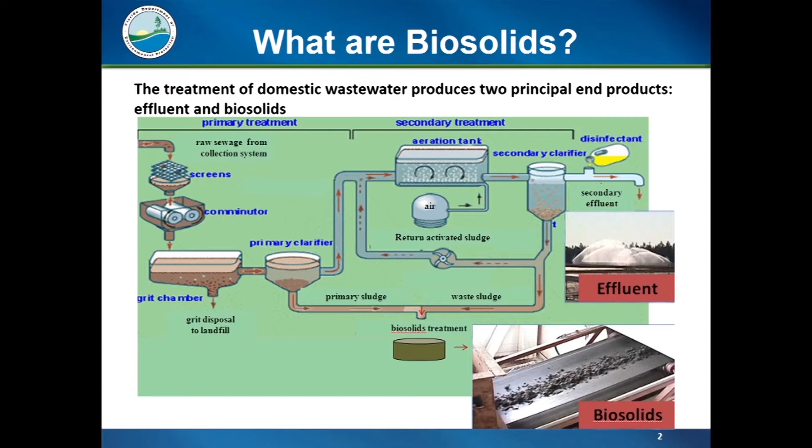So they are the solid, semi-solid, or liquid material produced from a wastewater treatment plant. As the biological process goes on, the microorganisms die, and those have to be wasted periodically. The term biosolids is actually defined in most modern dictionaries as the solid organic matter recovered mainly for fertilizer.

We use biosolids to mean all the material, whether it's treated or not. I know some states only want to refer to biosolids as the treated material. We used to use the term domestic wastewater residuals, but most people didn't know what those were. We had never used the term sewage sludge, and what happened was over the nation, the term biosolids just became the common term, the easiest one to find in our regulations. So we shifted to the term biosolids.

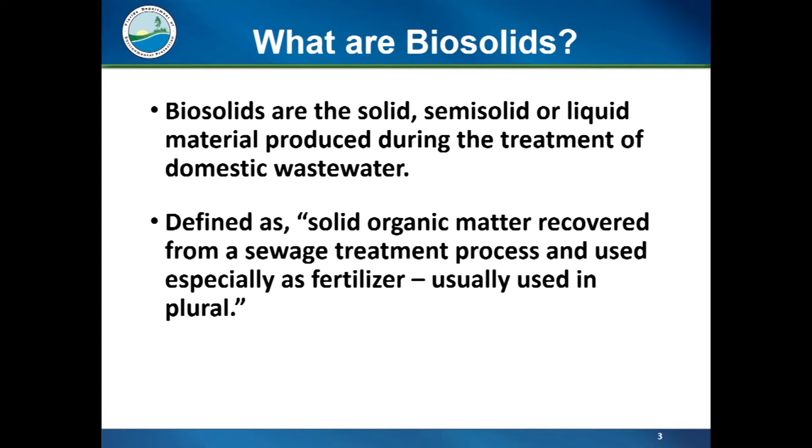Now when a wastewater treatment plant treats its sewage and comes up with biosolids, it has a number of options it can consider. Most facilities in Florida, because we have a whole bunch of small facilities, transfer their biosolids to other facilities for treatment. It's not cheap to treat the biosolids.

Can you hear me? Am I holding it close enough? It's not cheap to treat the biosolids, and when you get larger facilities, you have the economies of scale. So for small facilities, it's really not worthwhile — they're actually probably paying the most per unit cost per dry ton in transferring their biosolids to other facilities.

Landfill — biosolids can be landfilled. We put in every wastewater treatment facility permit the option to landfill their biosolids. But one thing we don't put in is that the landfill can't take liquid, so these biosolids have to be dewatered, then transported, and there are tipping fees. But just a word on landfills: landfills do not have to take biosolids, and only a small percentage do.

And those that do take biosolids operate on a rough rule of thumb of wanting at most 10% of their volume per day to be biosolids, because it comes in as a wet, muddy material that's hard for their equipment to work with. So for those landfills that do accept biosolids, they probably don't really want any more.

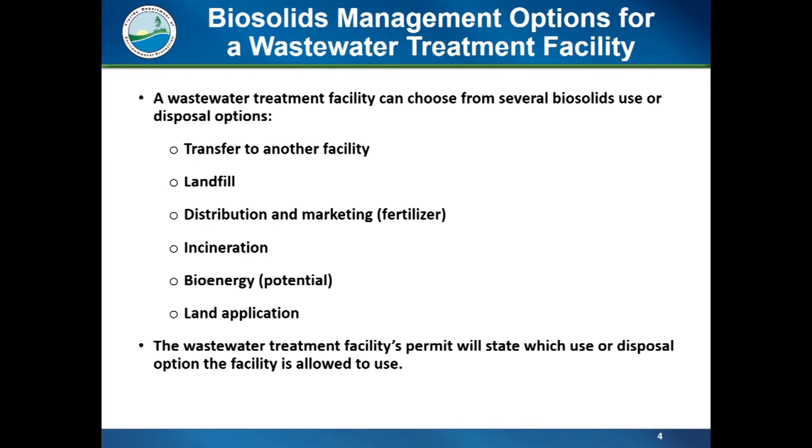We put in each facility permit what the facility is allowed to do.

Here's just a rough breakdown of the biosolids in Florida. We estimate that there's about 340,000 dry tons of biosolids produced each year, and that's raw biosolids, not final product. There's a lot of Class AA material, compost, some of the alkaline materials where a lot of materials are added into it, and then what we get reported back is that final volume of material, but we like to also know what the raw biosolids production was. So that's what that estimate is. For years, for like the last 5, 6, 7 years, it's been a pretty good breakdown.

1/3 has been land applied, 1/3 has been distributed and marketed, and 1/3 has been landfilled. It's kind of been shifting over this last year to a little more distributed and marketed, and probably a little bit less landfilled. And then we do get shipments from out of state. These are primarily, well, they're only pellets. And right now, it's down to just 10 to 20,000 dry tons a year. Back in the early 2000s, that was around 100,000 dry tons a year.

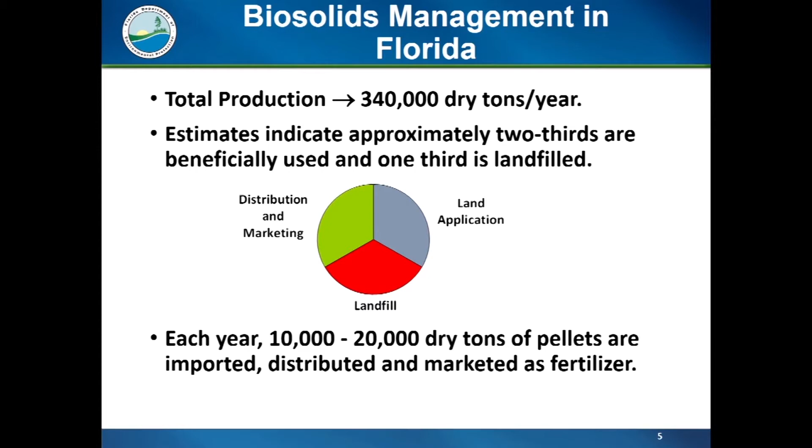So I mentioned a little bit about Class AA and Class B. There are 3 classes of biosolids allowed under the regulations. Class B is the lowest quality for beneficial use, and that's what we see, that's for the land application. Class A is a category we have, but we really don't see that. Basically, that meets Class A pathogen reduction, but it doesn't necessarily have to meet the stricter metal limits of Class AA. And then we have Class AA, which is the highest quality for beneficial use.

So I mentioned land application is Class B, distribution and marketing as a fertilizer is Class AA. And if you look at the federal level, you'll hear a term Class A exceptional quality. That's what we have defined as Class AA.

The reason we really don't have any Class A is if they provided that Class A pathogen reduction, biosolids in Florida are generally low in metals, so they really already meet it. If a facility is providing that level of treatment, they're going to qualify for Class AA biosolids, and why not take advantage of the distribution and marketing options for the Class AA.

Then the rest of the rules are kind of based on what you want to do with it and what class of biosolids you're going to produce. And it's designed to really protect from 3 things: the pathogens, the nutrients, and then the other pollutants that might be in the biosolids.

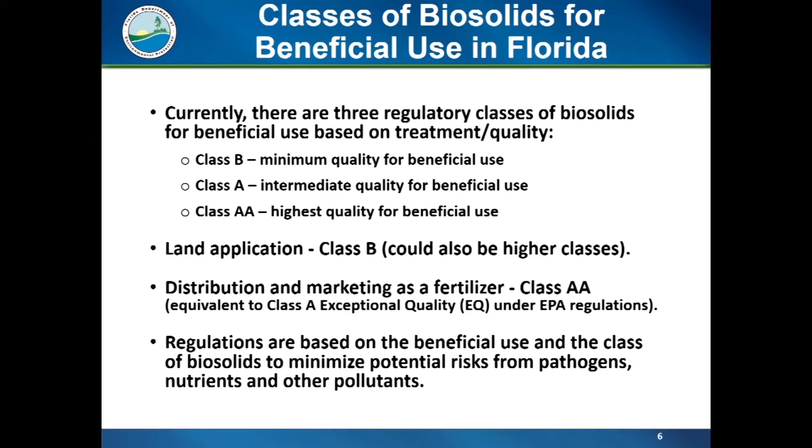For treatment, I mentioned the Class B treatment. That is treatment to significantly reduce pathogens. And then the Class A or Class AA treatment basically virtually eliminates pathogens. And then whether it's Class A, AA, or B, it has to meet a vector attraction reduction option. That's to reduce its attractiveness to birds, rodents, insects, so that any potential pathogens in it won't be transported off-site by those vectors. And then for Class B, because there are potentially pathogens remaining in the material, there are a number of site restrictions in our rules that help to protect for pathogens from Class B biosolids until those pathogens have a chance to die off in the environment.

Nutrients for land application are limited to the rates that the crops need. There are some phosphorus restrictions in certain areas of Florida, basically based on statute. Land application sites have to have a site-specific nutrient management plan, and we'll talk about that a little later. And then there's a number of site restrictions that help to minimize the nutrients. We have slope requirements, setbacks from surface waters, a minimum depth to groundwater. These all help to minimize the potential impacts from nutrients.

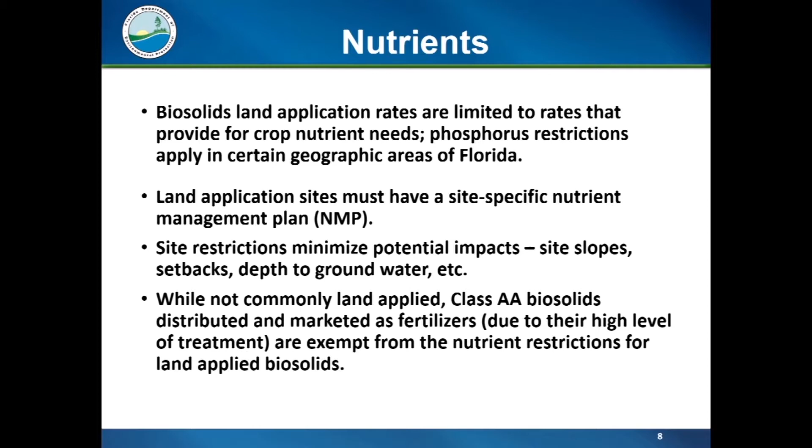And then Class AA biosolids are not normally land applied since they have that option to be distributed and marketed as a fertilizer. So they are not subject to the same nutrient restrictions that Class B are. And they've basically been pushed as much as we can into the fertilizer world.

I'm still trying to figure out where to point. Up at the box, okay.

So, for the pollutants that might be in biosolids, our rule is based on the federal rule. There's 9 metals that are regulated. This came from an extensive EPA risk assessment.

Those are the ones that they determined appeared in the biosolids frequently enough and at a high enough concentration to be a potential health concern or a concern to the environment. There's two sets of limits.

There's how much of these pollutants can be in the biosolids themselves, and there's two subsets of that. There's ceiling limits that both Class B and Class AA have to meet, and then there's the more restrictive Class AA limits.

And then for land application, there's a site lifetime limit on these metals, how much can be applied to this site before they have to cease land applying. Because most of the metals in biosolids are fairly low, and we require on permit applications for sites that they predict how long they can use the site, it's typically in the 200, 300, 700 years that they can continue to use the site before they meet one of the cumulative limits on applying biosolids to the site.

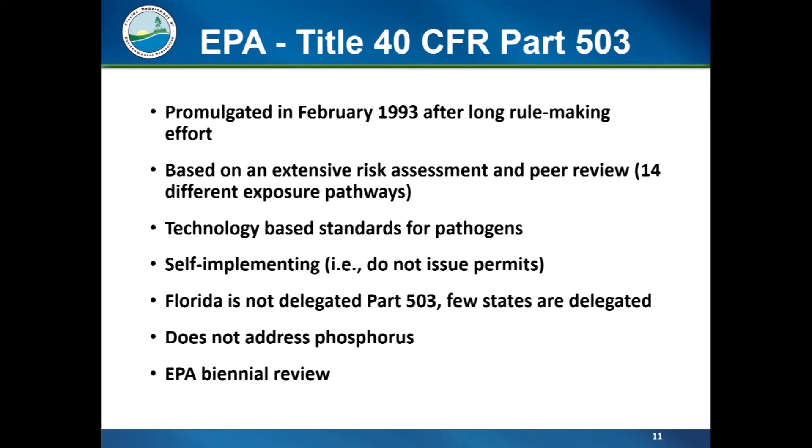Okay, for Florida's regulations, they originated in solid waste rules back in 1984. In 1991, Chapter 17-640 was adopted. EPA was working on Part 503 at the time. That was going to be under the Office of Water at EPA's level. So 640 was going to come under the Division of Water. It made it through faster than 503 did.

So then when 503 came out in '93, Chapter 62-640 was revised in 1998 to be more consistent with the final version of Part 503. There were some minor differences. The original 640 had a Class C type of biosolids that was going to be under the federal rule, but then it did not make the federal rule that came out in '93. So things like that had to be updated. There were more metals in the final 503, so those had to be added to the rule as well.

Okay, some of the key differences. We actually issue permits, EPA doesn't. We issue permits not only to the facilities, but we issue them to the sites. We require a nutrient management plan, EPA does not. We have phosphorus provisions in our rule, EPA does not. And then we have a number of additional management and site restrictions in our rule that EPA does not have either.

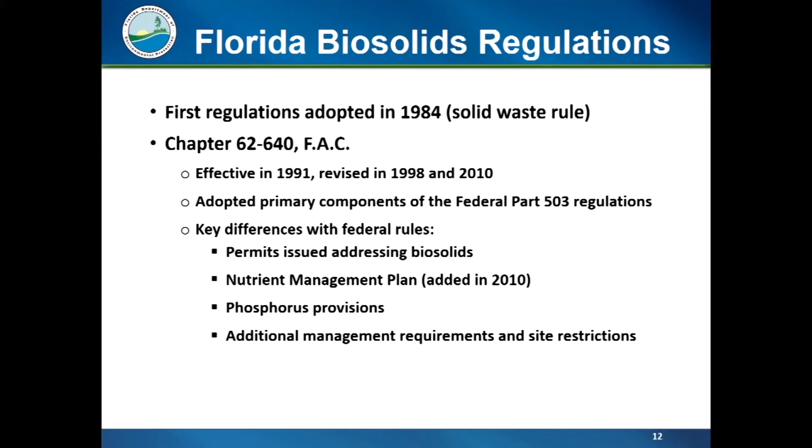So now, one of the more popular uses, let's move on to that. We're going to talk about Class AA biosolids, and then I'll talk about land application in Class B biosolids. Basically, Class AA distribution and marketing is the sale or giveaway as a fertilizer without any restrictions on the end user. We enhanced our rule in 2010 to help push AA more into the fertilizer world.

We require them to be distributed and marketed under a fertilizer license, or to someone with a fertilizer license, and that way they'll fall under that fertilizer world.

I don't know if you've ever looked at the DEP fertilizer tonnage reports, but a number of utilities are showing up there. Some don't. One you'll hear about today, the Palm Beach Pelletizer run by New England Fertilizer, sells all their pellets to fertilizer brokers, blenders, and companies. So their pellets show up on that report, but you won't see them specifically because they're included in the tonnage for Diamond Fertilizer, Griffin Fertilizer, or Florida Fertilizer Company.

We have about 39 facilities in Florida that produce Class AA. I say approximately because every year we seem to lose one and gain one or two, so it's this constant back and forth. Some utilities do a AA product for years, then as they're reaching the equipment's lifetime decide they don't want to do it anymore, so they back off and go back to either Class B or landfilling. We have a wide variety of treatment processes, and we do see a slow, steady trend in the increase in Class AA.

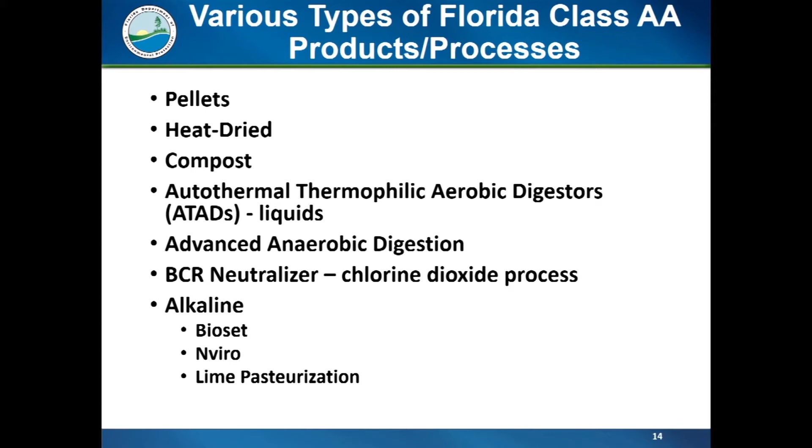We have a wide variety of processes, which turns into a large variety of products. We have pellets, which I think are the most publicly acceptable. Heat-dried is similar to pellets, it's just not uniform. Compost. The ATAD is a liquid biosolids product. So don't think of AA as just pellets or just compost—there's anaerobic digestion processes, there's also a BCR neutralizer chlorine dioxide process, and then a number of alkaline-based processes, Bioset, Nviro. We actually have a facility that does lime pasteurization, which is probably the least publicly acceptable of the AA processes.

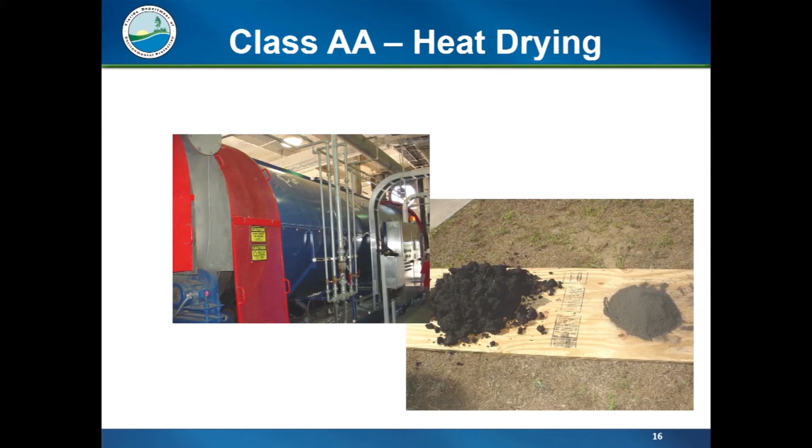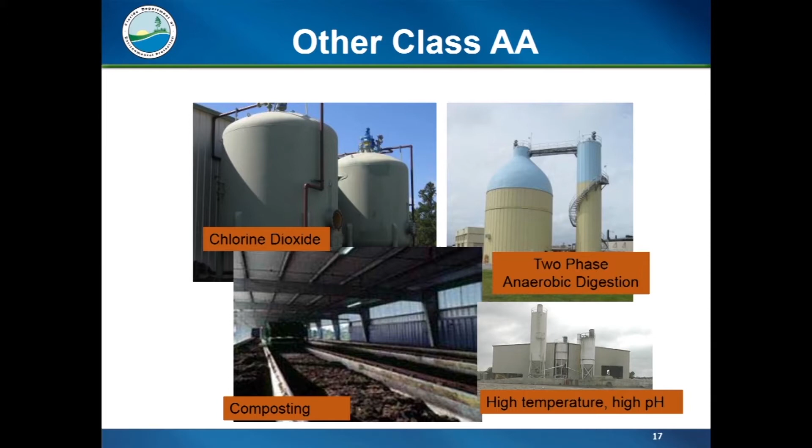Just a picture of pellets here—that was a comparison between old Class B and some heat-dried material. And then various other processes: the composting, that was an in-vessel composting, and then high temperature, high pH processes, the alkaline processes.

For 2016 I compiled those numbers. There was 191,344 dry tons of final Class AA product distributed and marketed in Florida by those 39 facilities. Note that sounds like more than a third of 340,000 dry tons of raw material—remember, a number of these AA processes, like compost, add additional material. We actually have one facility that only adds a little bit of biosolids to their compost, so that final tonnage is a little deceptive.

It's deceptive for other reasons too. Some facilities stockpile for a while and then distribute it all in one big quantity, so they may actually have some from 2015 they distributed in 2016—it all depends. There was also some Florida biosolids distributed and marketed out of state, just a little bit, and we have 5 facilities that shipped biosolids into Florida, about just under 10,000 dry tons, for 2016.

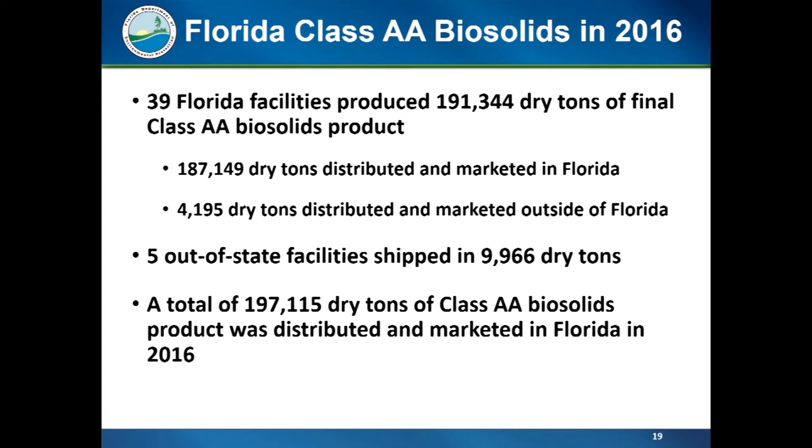For the number of facilities down here, Lee County on the West Coast does composting, but given the number of facilities, not as many do AA as probably could be doing it. Miami-Dade has been playing around with the idea of doing AA and has had a number of projects looking at it, but they still do Class B and landfilling in addition to their little bit of AA.

Okay, so land application—we can talk about that now. It's basically the application of Class B biosolids, we'll say Class B because that's really what it all is, at a permitted site that follows a nutrient management plan and meets all of our site restrictions and requirements. Why is it land applied?

Because it contains the nutrients the crop needs, primarily nitrogen and phosphorus, but it also contains some of the micronutrients that the crop needs as well. And one of the big benefits is the organic matter that it adds to the soil.

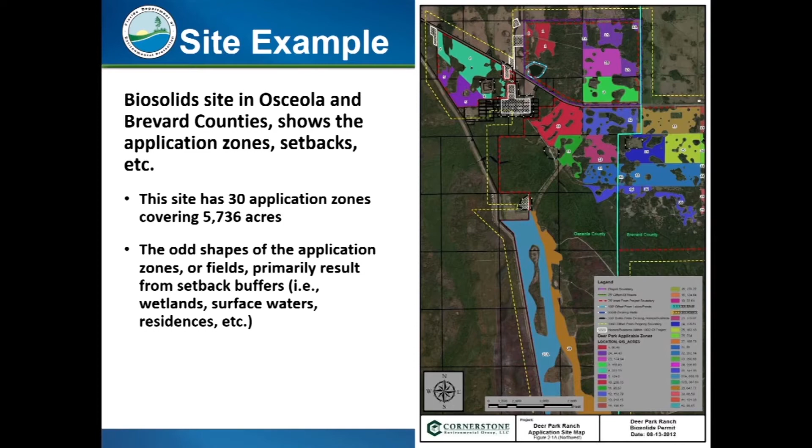And the odd shapes of all those zones are because of the setbacks to either sinkholes or surface water or wetlands. So there's a lot of detail that goes into the permitting of the land application sites.

We mentioned the nutrient management plan. It has to be done by either a certified nutrient management planner or by a professional engineer. It identifies the zones, it identifies the crops, how the NMP will be implemented. Any tissue testing or any soil testing, now that only has to be in there as applicable. If they're basing their rates on some of those results, then they need to be part of the NMP when they submit it. But really, the application rates are the heart of the NMP.

And we do have a requirement for them to consider the migration of phosphorus off the site. The only tool out there right now is the Florida Phosphorus Index. I think I have a separate slide on that. But basically, they have to take into account all nutrient sources to the site and to their zones.

There's a couple other things they have to do. Realistic annual yield goals. If they're going to base their rates on harvesting, then they have to have a realistic goal. And I don't know how I'm doing on time. So anyway.

Actually, I might get there.

The P index is something that came about with the nutrient management plan. It's used by NRCS, developed by them with help of stakeholder agencies and primarily University of Florida. The IFAS professors did a lot of work to develop this. The current version was adopted in 2004. It basically looks at both runoff and leaching and tries to assess the risk for migration of phosphorus off the site.

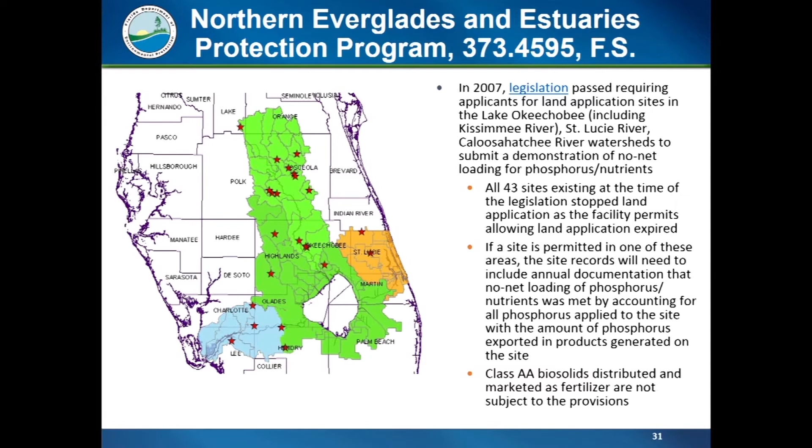This is probably familiar - the Northern Everglades statutes. In 2007, there had originally been 43 sites in the Okeechobee, St. Lucie River, and Caloosahatchee River watersheds. As those facilities using those sites came up for permit renewal, they became applicants, which is how this was enforced, and these sites are all gone now, all phased out over the 5 years after that.

In 2010, they passed a bill that was going to prohibit the land application of septage by 2016, affecting about 80 to 90 septage management facilities around the state. It applied to the DOH statute, Chapter 381, but our facilities are permitted under 403, so it did not apply to our facilities.

Under our rules, basically septage is regulated like biosolids, and since 2016, we have permitted 42 septage management facilities and their corresponding sites.

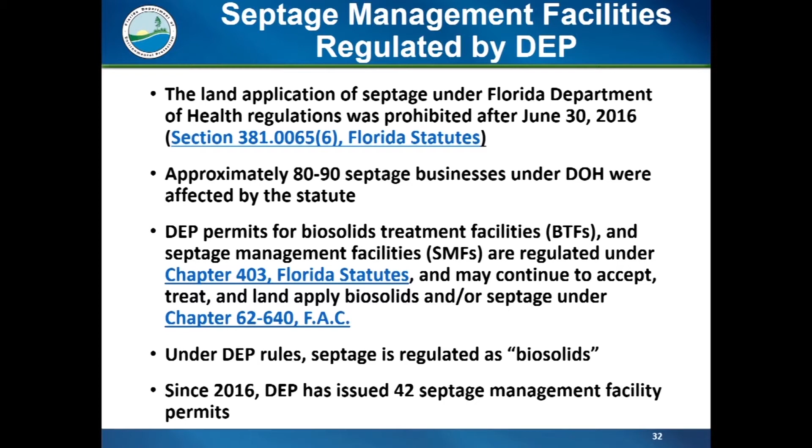Just to let you know, facilities have been trying alternative technologies over the last 10 years in Florida. The City of Sanford and Maxwest tried gasification - they were working on it, but it didn't prove viable before Maxwest ran out of money, so that is no longer operating. Maxwest filed for bankruptcy. It's my understanding the only thing left at Sanford is the building - they auctioned off all the equipment, and it's been moved out.

Orlando, City of Orlando tried supercritical water oxidation. From a news article, I guess they suffered an explosion back in 2014 because it is a very high pressure process, and they have not, to my knowledge, tried to restart that.

We do have some anaerobic digestion. We have some older facilities that make some use of their methane. There's a facility in Orlando, Harvest Energy Garden, that accepts a number of other organic waste in addition to biosolids, and their final material, I believe, is heat dried and made into pellets. So they still have the issue I brought up: there's still a certain large volume of biosolids left after the methane producing process. St. Pete is planning this type of a process as well.

Okay, and then waste to energy facilities. There's a number that have that option to burn them in their permits. They don't right now. I think 50 dry tons was burned in 2017 as far as I can tell. I think it's just so that that option is there. I don't think they really want to do it, but it's there in case they need it. There are concerns, there are air permits involved and concerns with that.

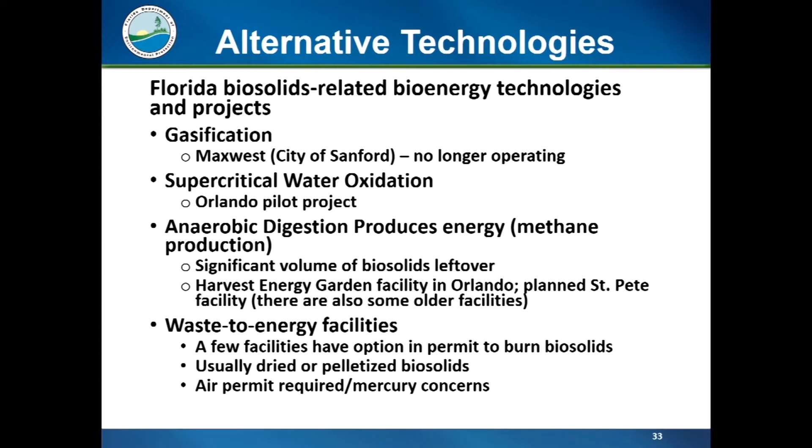Okay, coming up is Jennifer Smith. She is the director for the Southeast District Office, and I believe she has an announcement to make.

Good morning, thank you Maurice. The Florida Department of Environmental Protection is committed to protecting Florida's water and natural resources. And vital to our mission is working cooperatively with state, local, and federal agencies, as well as local communities and various stakeholders and interest groups that can provide key input, local knowledge, and additional data and information to help inform our regulatory and restoration programs.

DEP is aware of increased interest in better understanding the nutrient impacts associated with land application of biosolids. And because the department remains committed to using science to guide our efforts, we're creating a Biosolids Technical Advisory Committee. This committee will evaluate current management practices and potential opportunities for enhancements to better protect Florida's water resources.

So DEP is currently seeking nominations for membership on this committee. Membership will include various groups: agricultural interests, environmental interests, local government, academia and research, representatives from large and small wastewater utilities, including the Florida Rural Water Association, biosolids haulers, and the Florida On-Site Wastewater Association. The deadline for nominations is July 6th.

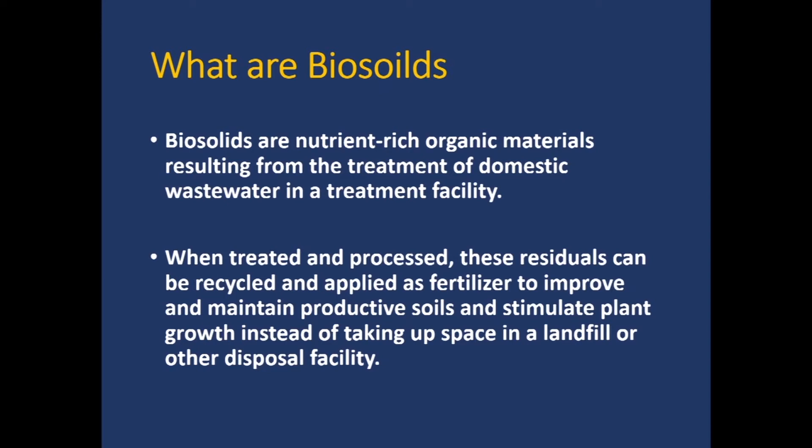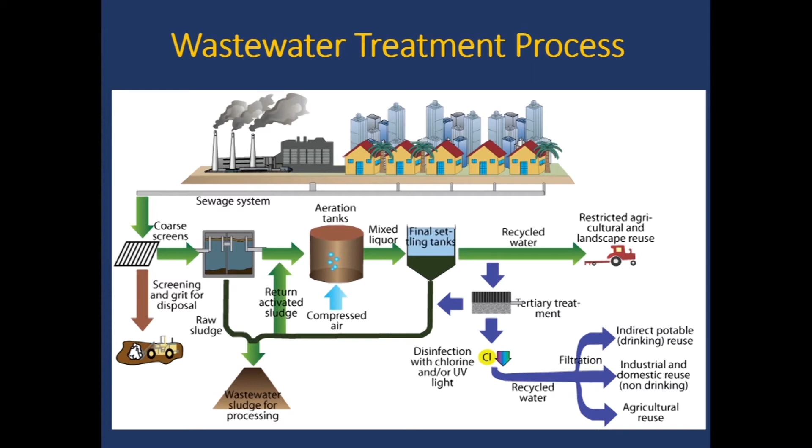Class B and Class AA, I'm not going to spend any time on this. It depends on the type of treatment received, and the product is fertilizer to different degrees, marketed differently. If it's Class B, you have limited public access. The rest are used for golf courses, agricultural, landscaping.

As far as Palm Beach County, we are the largest county in the state of Florida, if I'm not mistaken, covering 2,400 square miles, 1.5 million population.

Nearly 10% of the population has septic tanks in Palm Beach County, so about 100,000 people are on septic tanks, nearly 40,000 parcels.

We have 18 wastewater treatment plants throughout the county, starting from the Loxahatchee Environmental Control in the north, Seacoast, East Central Regional, Village of Wellington. These are the larger ones I'm going over: Palm Beach County, Southern Region, South County Regional, City of Boca Raton, and also two western wastewater plants for the cities of Pahokee and Belle Glade.

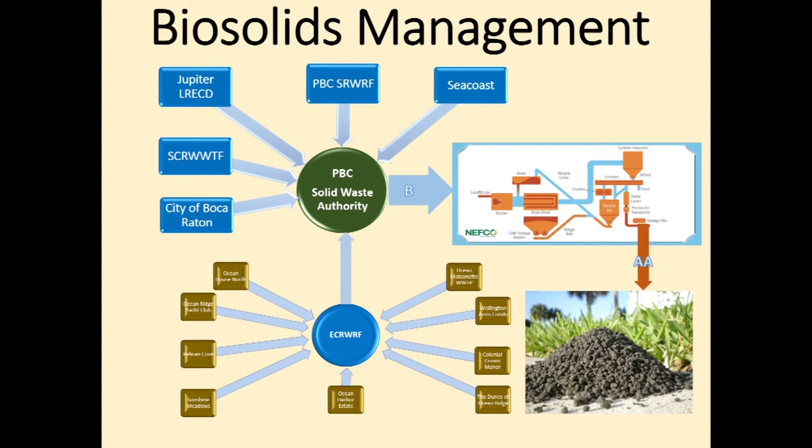The other remaining wastewater plants - Village of Wellington produces AA sludge themselves. And the two other smaller facilities at Belle Glade and Pahokee send it to McGill Brington Organic Compost and Omni in Osceola County.

This table summarizes the limitation for Class AA sludge, as we see here. The product produced by NEFCO, which is the AA sludge, is extremely less than what the limits are. These are the metals, by the way, not the nutrients. You see it's a fold of 10 to 20 times less than what the limits are. And even our Class B sludge has much, much less metal than what the AA requires.

The Class B sludge, the one we actually produce in our wastewater treatment facilities, has about 4%, 3.4% phosphorus, and close to 5% nitrogen. That's what we do in Palm Beach County.

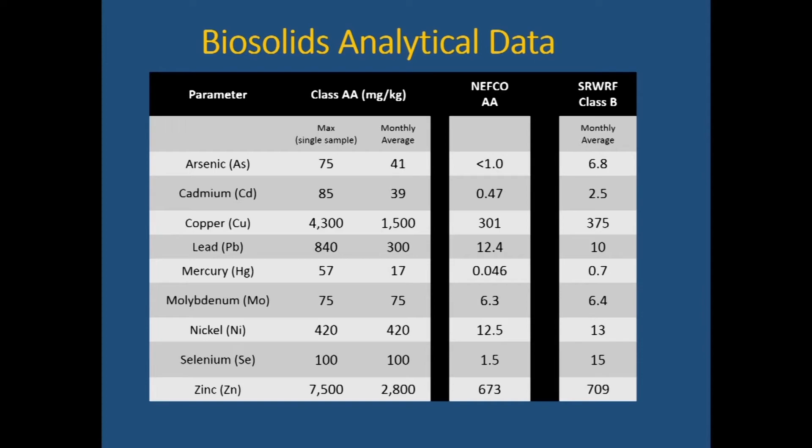Next up is Martin County. Mr. Sam Amerson is the brand new director of Martin County Utilities and Solid Waste.

Thank you very much, and good morning. It's good to be here, and thank you for the invitation to share with you our story in Martin County. Before I get started - you told me it was that box, there we go. Once again, moving too quickly. That's a little slow. Anyway, before I get started, I want to recognize an individual, Mr. Todd Leland.

Todd is our water and wastewater treatment division manager. He's a great guy. When you talk about a good steward of the environment, Todd is the epitome of that. He manages all our water and wastewater facilities, our reuse, reclaimed systems, and also biosolids management. So I want to thank Todd - raise your hand, Todd. If you have any questions at the end of the slides, Todd is the guy. If I could clone anybody, it would be Todd, trust me.

In Martin County, we've got two facilities. The county underwent some acquisitions over the last few years, acquiring some package plants to eliminate problems with those privately owned and maintained plants, and now we have two facilities. One is the South Plant, Tropical Farms, about 5.9 MGD of wastewater daily, and then the North Plant, in Jensen Beach, permitted at about 2.6 MGD.

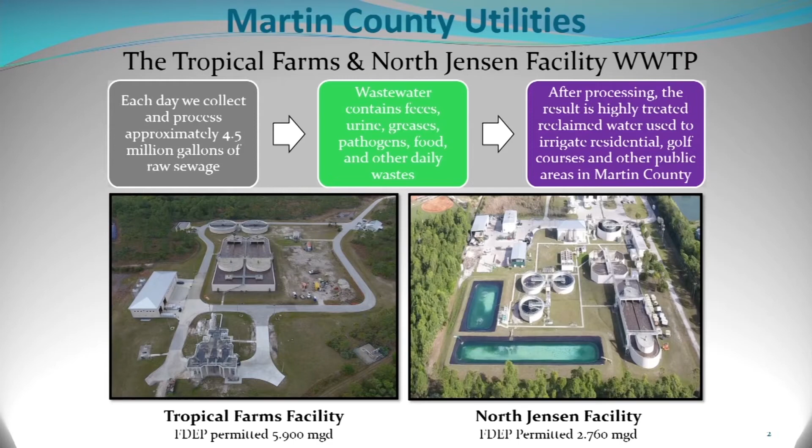Both of these facilities produce reclaimed water as well. We're treating about 4.5 million gallons daily. You all know the constituents in wastewater, but we do have a process to produce a high quality effluent, which is fed into a pressurized system that serves golf courses, residential properties, and some commercial properties as well.

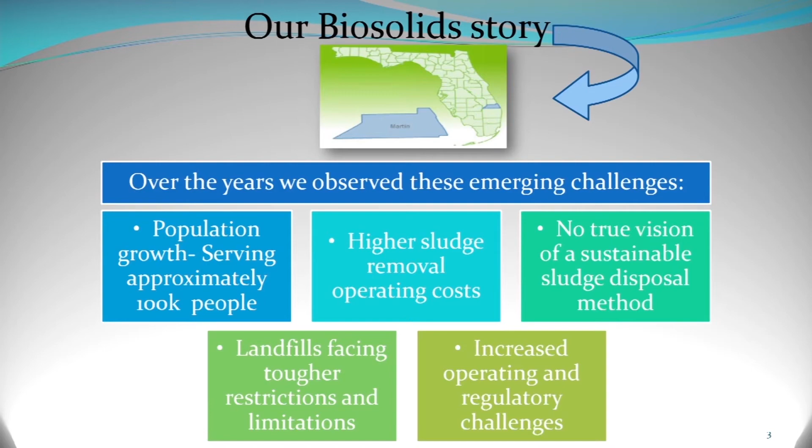Over the years, we've seen some challenges, and there have been some more emerging challenges even more recently. Of course, one of those is population growth, impacts on the environment, and what we do with the additional wastewater and also biosolids resulting from that. We serve about 100,000 people currently on our central system. Along with that, we've had to deal with sludge removal, operating costs, perhaps not having a comprehensive vision for sludge disposal or disposal methods over the years and into the future. We've got landfills where we dispose of, having additional restrictions on those, and also the regulatory and inflationary pressures we've seen in the treatment process.

We think we're on the right road to a greener and more sustainable biosolids management plan. Starting about 1985, most of you are probably familiar with sludge drying beds. We'd take the sludge from the clarifier or digester, distribute it in beds, and it would dry out in the open. Once dried, we'd collect that and dispose of it at landfills, sometimes with land applications. Probably wasn't the best process.

Moving on, in 1997, we began doing alkaline stabilization to treat pathogens. Most of that was also land applied.

And then in 2002, we began a new process of mobile centrifuge, where we had a company, in this case I think it was Synagro, or one of those companies, provide an on-site centrifuge with a generator to power that. Interesting enough too, I just did some research going back through the ordinances over the years.

The commission took action in 2001 to actually establish setbacks from surface water for the application of biosolids and sludge, at the time called sludge Class 1 and Class 2. It was renamed or reclassified as Class A and Class B. At that point, they put a restriction of 400 feet from surface water to apply Class A biosolids, and then 800 feet for Class B biosolids. Then in 2002, they actually put a complete restriction on the application of septage in Martin County.

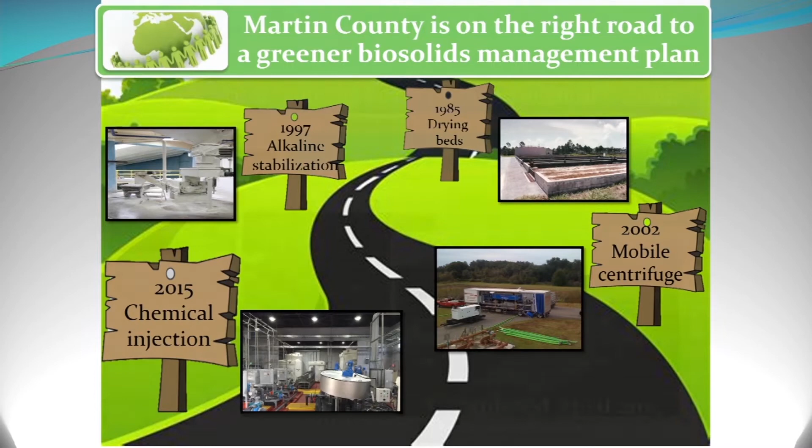And now we have a chemical injection process that can produce Class AA exceptional quality biosolids. Doing that, just to be more part of a green and sustainable county, we now have a beneficial use for our biosolids. This project was completed in April of 2015 and is currently operational.

Today, we're not producing the Class AA. Todd's going through a series of tests, running some efficiency studies, and taking samples of the influent, effluent, biosolids, nutrients, percent solids, and putting together some spreadsheets. If you need to look at a spreadsheet before you leave today, please see Todd, he brought those with him. But that's been in operation since 2015.

So the process here, I'll describe briefly. Our waste-activated sludge coming off the bottom of the clarifiers is about 1% solids, running between 0.8 and 1.3, but averaging about 1%. We add some polymer in the process to thicken the sludge to about 4%. We then move that into a process tank, add ferric sulfate and chlorine dioxide, and after several hours let that mix. We lower the pH and add sodium nitrite, then raise the pH, add polymer, and begin the dewatering process through centrifuge.

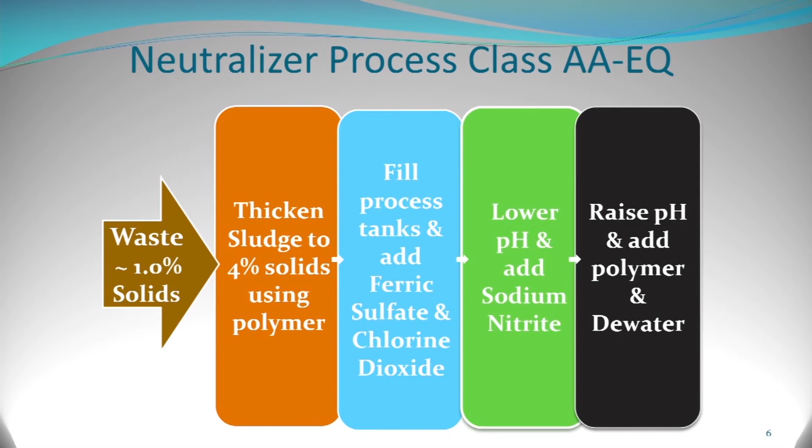It's ferric sulfate. We add ferric sulfate in the process to bind up the phosphorus. Next, we add sulfuric acid.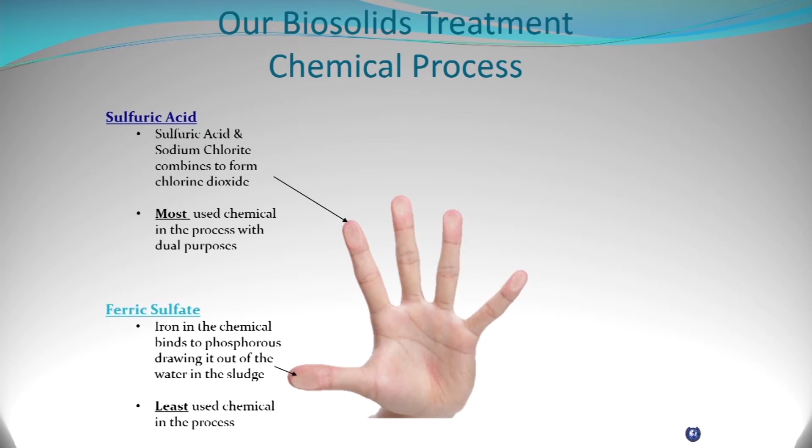We add sodium chlorite. These then combine to form a chlorine dioxide for some pathogen reduction. We add sodium nitrite next as a neutralizer, and then also the last ingredient is sodium hydroxide.

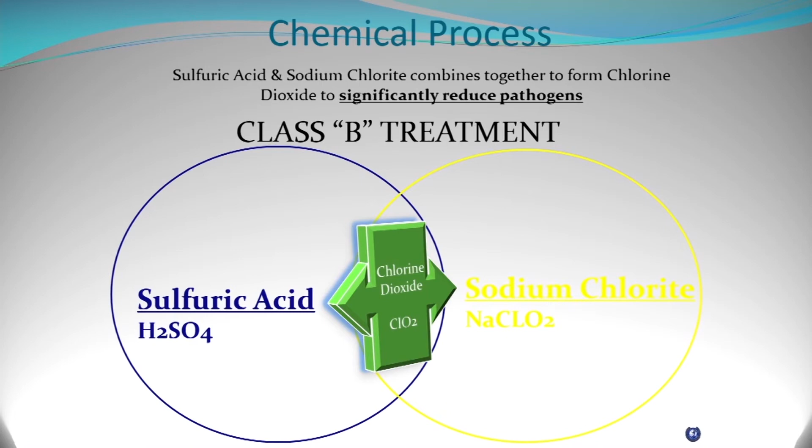Todd refers to these three as the three sodium amigos, but that's what develops the punch in the process. I mentioned the chemical process of sulfuric acid, sodium chlorite, and then that combines with sodium nitrite to get us to this class of treatment.

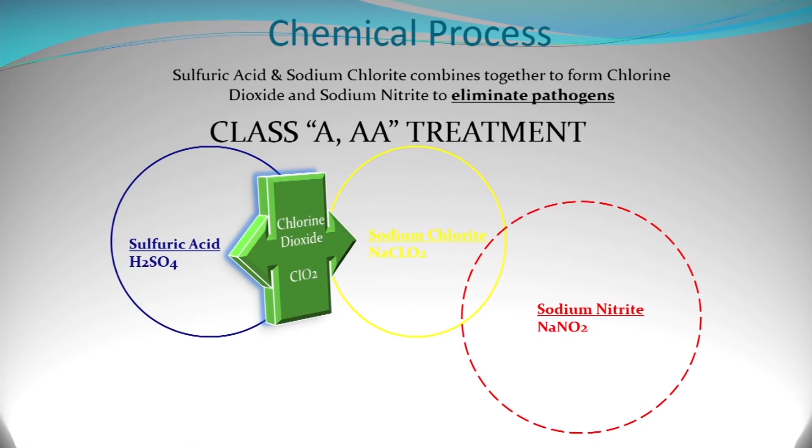And real quick, I'll run through some slides. This is a photograph of our South Treatment Facility. This is the biosolids processing unit. This is the sludge thickening equipment.

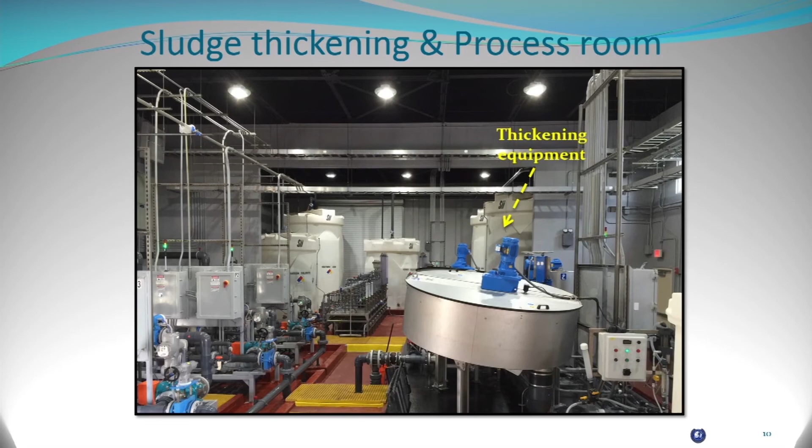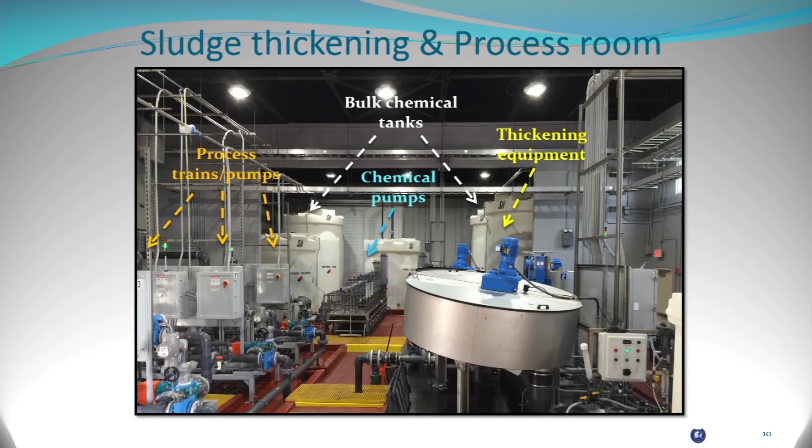We get that to about a 4% solids at that point. In the back, you'll see 5 chemical storage tanks, and then to your left on the slide we have some chemical pumps and also the process train equipment that transfers that sludge into the process tanks. Tanks are located at the back of the building. They're stainless steel tanks.

Hope that didn't make anyone dizzy. Yes, made me dizzy. I've looked at it about 10 times.

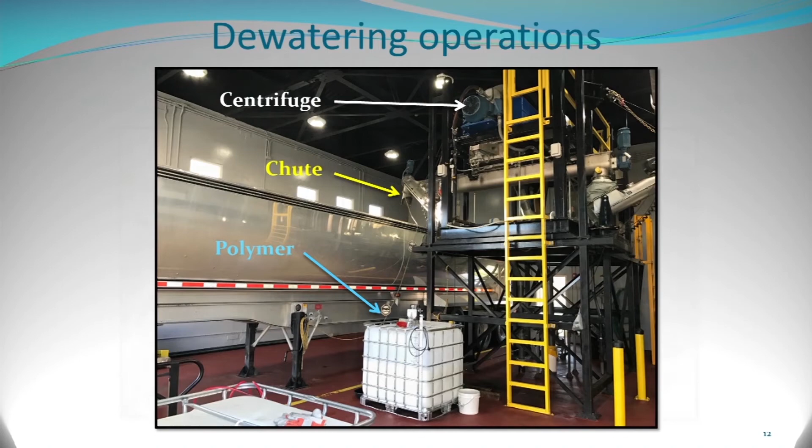So it then comes from the process tanks. It's treated with polymer. It then goes into the centrifuge, which is circular, dewaters that sludge, and then the dry solids go through the chute into the hauling truck located in the truck bay.

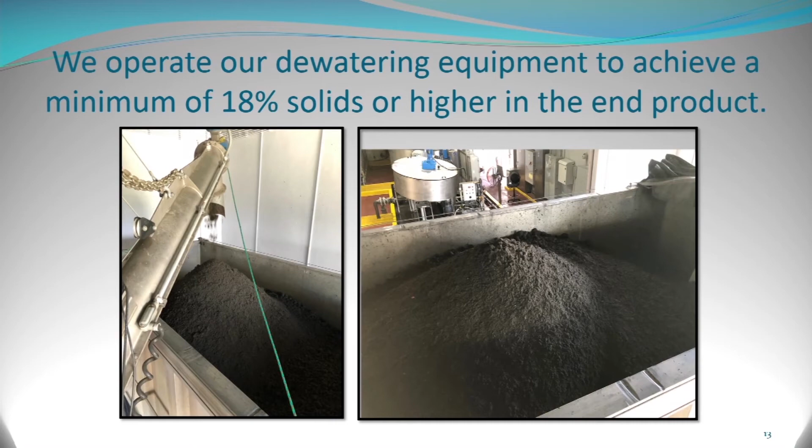We've been achieving at least an 18% solids content in the end product. We can get higher, but that's about our minimum solids in the end product.

As mentioned earlier, there are generally 3 disposal methods or 3 places the solids go. We've got distribution and marketing, which is a preferred option. The second option is land application, second preferred option, and then of course the landfill option.

One of our vendors that we utilize to haul the sludge and the solids, we prefer McGill at this point. They have a composting facility, you've heard that mentioned earlier, in Brighton. They generate a product from that. The other option, which is not preferred, is a landfill, and then also land application sites in rural areas.

And that's our story.

Next up, we have St. Lucie County, and Pat Walsh is the project manager for St. Lucie County Utilities. Pat?

Thank you. Yep, Pat Walsh. I'm the project manager with St. Lucie County Utilities, and I'm responsible for the operation and maintenance of all the water, wastewater, reuse facilities, and associated infrastructure.

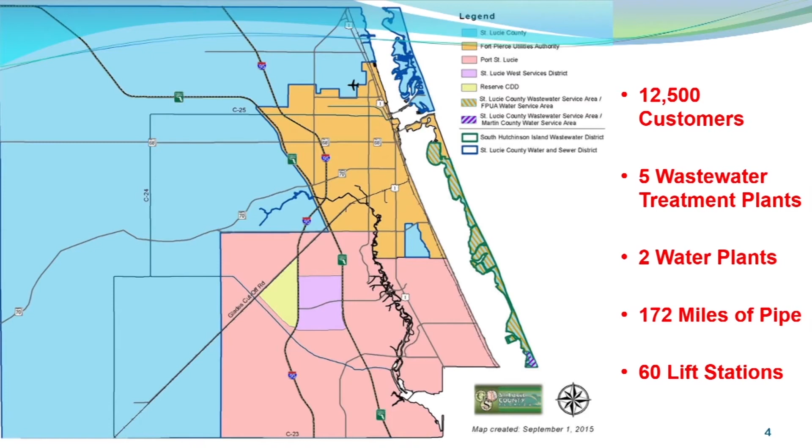In the North County, we maintain what we call the North County Water and Wastewater Facility, and that's where we're seeing the most growth occurring in St. Lucie County, so any expansion of utilities is occurring in the north. The areas on North Hutchinson and South Hutchinson Island, both facilities are currently designed permanently to handle all the growth of all the residents now and in the future on the islands, so we don't anticipate any expansions of the facilities out on the Barrier Island. We anticipate the growth from a utility standpoint to occur in the light blue area that we see on the map.

Talking about the 5 facilities we operate, let's break them down. South Hutchinson Island has a capacity of 1.6, and we treat 12,200 residents on the island. North Hutchinson facility recently went through an expansion, so we're permitted for 850,000 gallons, which will handle all the needs of the residents on North Hutchinson Island, and we service 7,400 customers on the island.

North County wastewater facility was a utility purchased from a developer by the county, and we're currently permitted at 300,000 gallons per day. We service 4,000 customers in the North County, and we also have a water treatment facility servicing 4,000 customers there. We have smaller facilities that handle flow from the regional airport, the industrial node at the airport, and a small utility that services 90 customers in the Lakewood Park area, which is 90 homes.

Looking at this breakdown, the South Hutchinson Island facility treats 171 million gallons a year in wastewater. Of that, 99% is treated to a tertiary level where it's pumped back to the residents to be used as public access reuse. The North Hutchinson Island facility treated 76 million last year, and once again 99% of that went back to the residents as reuse.

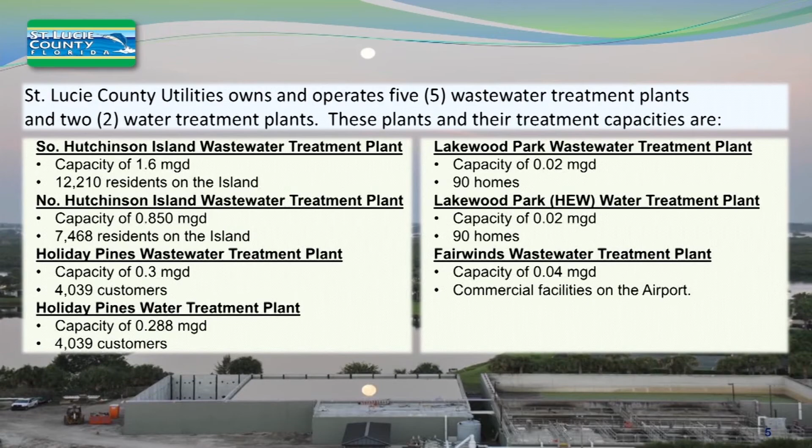This is a brief statement of the future of St. Lucie County. We're looking to do a water interconnect on the North Island to improve the redundancy of service for the residents. We're also currently constructing water mains in the north part of the county along the Turnpike Feeder Road and US 1, to provide water service for the northern node of the county. Additionally, we're under construction for a 16-inch water main and a 12-inch force main running out to 95 along the Indrio corridor. That will provide services for an additional 2,000 customers in the North County, where we're starting to see some growth take place. As part of that, we're in the process of expanding our north facility and our water and wastewater facilities in the North County to meet the demand for the northern part of the county.

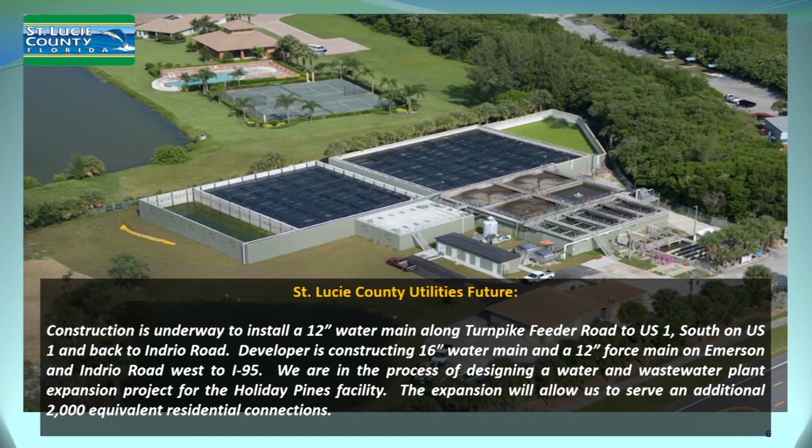The overview behind here is a picture of our North Hutchinson Island facility that I talked about. Just to give you an overview of the wastewater treatment facility, you can see the two bigger tanks that are covered - that's where the reuse is stored, which will eventually be pumped back to the residents. The 4 tanks there that are brown are the activated sludge process, and the white covered tanks you see are what we call the digestion, where the biosolids are stored in treatment for ultimate disposal.

That facility will take care of all the needs for the North County. There are a few nodes on the island still on septic, and whenever they're converted, we have the capacity to take care of that.

The wastewater treatment facilities we operate use what's called an activated sludge process. That's the most prevalent form of treatment in Florida. Previously there were other modes - rotating biological contactors, trickling filters - that didn't produce activated sludge or biosolids. But over the years, as we became more stringent on how we dispose of effluent, those processes didn't meet requirements from a BOD, TSS, and especially nutrient loading standpoint. So when disposing of effluent, we needed a level of treatment that can meet those needs in our permits. Activated sludge is the most prevalent and the best way to do it.

This is just an overview. Like I say, everyone else has given a great description of what wastewater plants do. This is an overview of what Indian River County maintains as far as their wastewater treatment facilities. We do have 6 permitted facilities. Out of those 6, one is classified as a repump station, and one is just maintaining a permit at this point for potential future expansion.

Out of the 4 that are left, 3 of them are what we would consider our regional facilities - the larger facilities. You'll see we have a West Regional, Central, and a South Regional facility. Those 3 facilities do put the product of their effluent, the reused water, into the system for the reused water, and their biosolids from those facilities are transferred to our regional dewatering facility.

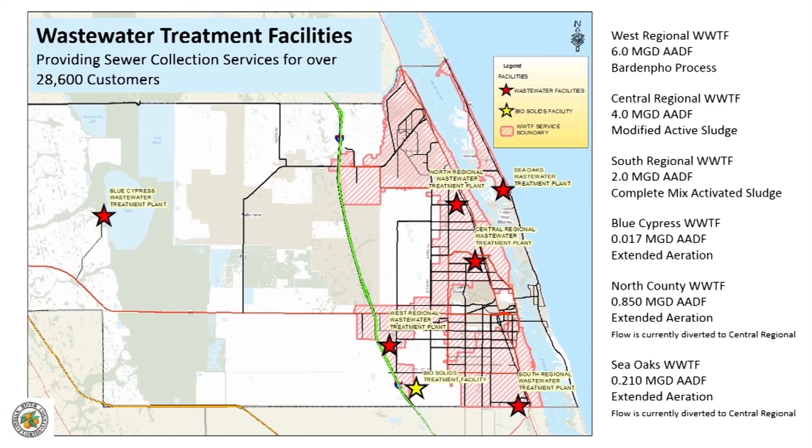Out at the landfill, we actually have a facility - our dewatering facility. It is co-located at the Indian River County landfill.

We actually own the facility, but the operations are contracted out to a dewatering company called Synagro. I think we've brought them up previously in the conversations, but Synagro maintains our dewatering operations out there. Indian River County basically brings the sludge to the facility, and it is dewatered. It's brought there probably at 2% solid, like Mr. Pat was talking about, and when it goes through the dewatering process, we get it down to about 22% solid. That product is then taken to our landfill and landfilled.

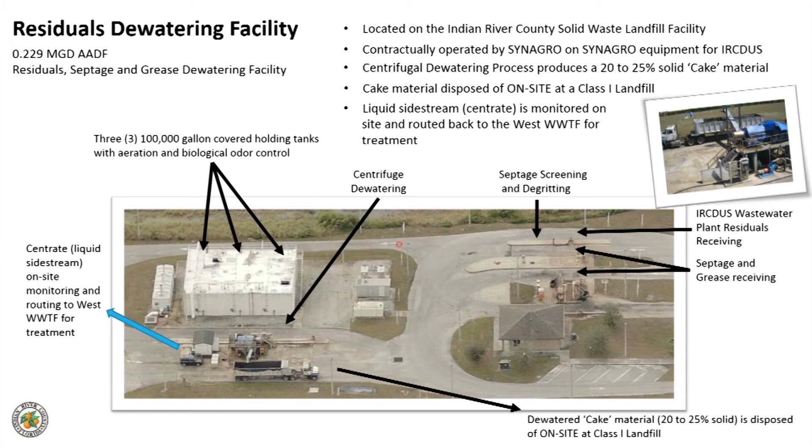I apologize for the amount of detail on the pictures, but to tie in with Indian River County, this goes back to a history about a couple of years ago. Indian River County operated that dewatering facility and had received a lot of use. It actually almost functioned as a regional dewatering facility, which did contribute to erratic loadings at our wastewater plant.

Because at the dewatering facility, the biosolids, the dewatered cake, is brought to the landfill, but the centrate from the dewatering facility is routed back to our West wastewater treatment facility where it is treated. The problem with not being able to control the loads coming into the dewatering facility was that we could not control the centrate heading back to our wastewater plant, thus causing problems.

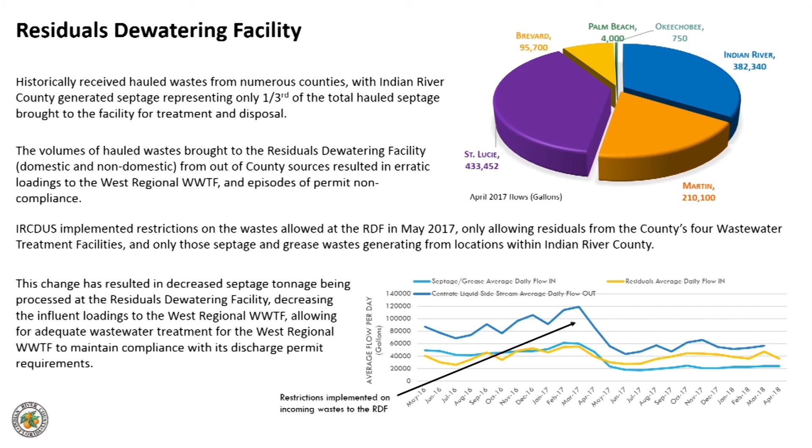I say that because we've been focusing on the wastewater plant with the residuals, but I also want to identify that biosolids can also come from the processing of septic tanks through the dewatering process. Indian River County has probably about 30,000 septic tanks, so septic tanks do need to play into this role as well as the biosolids coming from the wastewater plants.

Again, this is just a quick overview as to the choices that were taken. Indian River County does benefit from the facility being co-located at the landfill, so we are not having shipping costs to actually landfill our product. We generate about 5 million gallons of influent in the wastewater on a daily basis, and on an annual basis, we put about 1,800 dry tons of processed biosolids into the landfill.

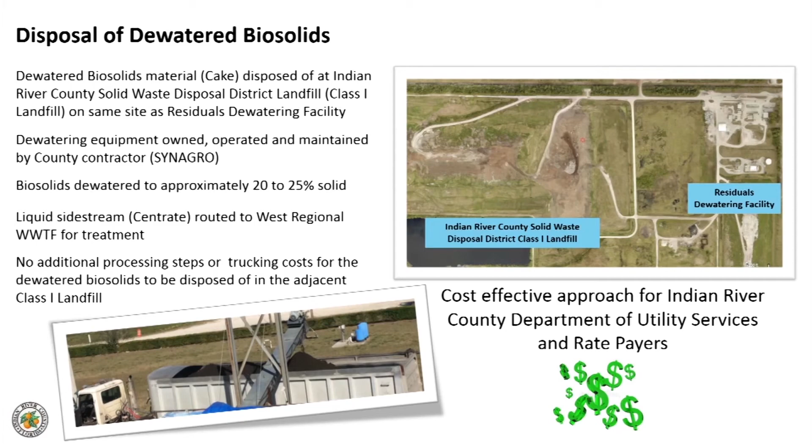Hi, my name is... There's a little switch on the front, on the top, and you got to switch it on. Okay. Hi, okay, it works now.

My name is Mel Bromberg from St. Lucie County. I have a question for Ron Roberts. Good morning. You mentioned, I would like to know what percent of the wastewater treatment plants were tertiary treated, and then second, the extent of the new technology you're using for getting up to tertiary treatment or wastewater plant treatment.

Currently, all of our regional facilities are providing tertiary effluent at a high level disinfection with filtration, providing public access reuse. In St. Lucie County, they are committed that any future expansion or new facilities constructed will be 100% reuse back to the residents for irrigation. As facilities are expanded or new facilities are constructed, treatment processes for biosolids will be a very important portion of the design and construction moving forward. The areas we operate right now are on the barrier island, and to process biosolids there with residents nearby would not be good practice. So that's why we're contracting, moving our material to biosolids facilities out in Brighton. Did that answer your question?